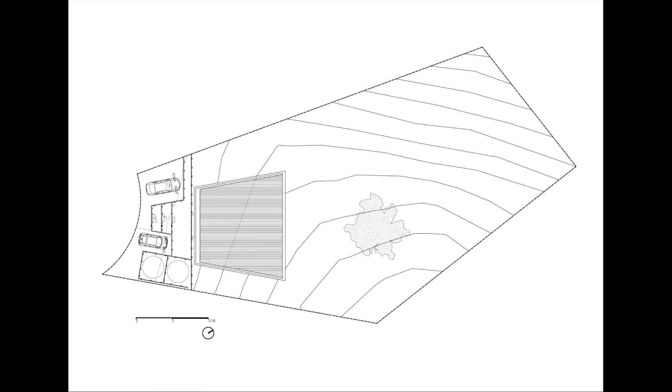The other advantage of that is from a solar orientation point of view, your northeast is your ideal orientation, right? So you've got your northerly aspect, but you've also got early morning sun preference, and then by the time it's getting past noon, you're starting to shade yourself. So from a solar orientation, it was ideal, and then from the wind, it was also a perfect match.

The other thing about this house, and probably it's my favourite thing about it, is it's a real Pandora's box in a way. It's a 4-bedroom house in under 100 square metres. So it's a very finely worked out plan, very minimal sized bedrooms, but again, it's just that idea of you need somewhere to stay for the weekend, come and get some bunks, put your bag on the floor, and then it's easy to pack up and go. So the house is about 100 square metres, the outdoor deck is about 20 square metres. So a large part of the plan is actually this covered outdoor deck.

The other way we sort of conceived of that deck space was not as indoor-outdoor flow. You know, you sort of hear this term of indoor-outdoor flow, we've got the big sliding doors and we open to the outside. We really tried not to do that, because with a small plan, we're actually trying to create lots of different smaller spaces underneath that larger ceiling. So we've created almost like a screen between them with a series of double doors, and that creates a very separate space in that covered deck area.

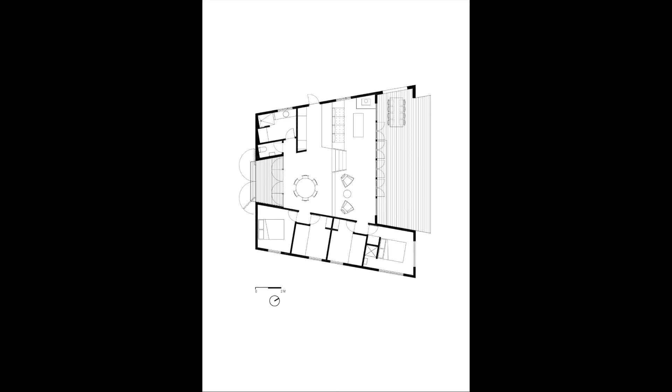This is a really successful house for having 18, 20 people around, 4 different groups doing things, kids everywhere, some people having quiet time, all within this very small package.

And to sort of enhance that separation of space, it steps down as the land steps down. So from the street, from the cul-de-sac, that's all you see of it. You basically don't see anything. It's locked up with big gates. There's sort of a recessed entry where you can hose the dog down and chuck your wetsuit, and then you get into the house proper.

So that's down into the front entry. And then that's from the south, the other side. So we're looking at sort of from the northwest direction. We just stepped the decks down and the levels to the maximum height legally allowed without a balustrade. So it is quite dangerous for small kids, but apparently the Building Code of Australia says not dangerous enough to be concerned, so I was okay about that. And it also just removes any obstruction of balustrades from your view.

That's from the main face. And then from the side, it's a really simple construction. It's one of those jobs that had a very limited budget. It's maximum volume, minimal sort of detail to it. The cladding is a silvertop ash cladding. It's in a wildfire overlay area, so it's one of the 5 species that protects itself and weathers into the environment.

So inside, we've got a dining area stepping down to a living area, then out to the deck. So as I say, quite a simple house inside, but incredibly efficient both in plan and in weekend use, being able to clean it and get out of there, and also for heating and cooling. So you just spend a lot of time down on that deck, you're always out of the wind. And it has a window in it, it feels like a room, it's got a very tall ceiling to it. And that's part of the way we got the bedrooms so efficiently, is we did these built-in bunk beds, and they sort of reference that back facade of the house in its design.

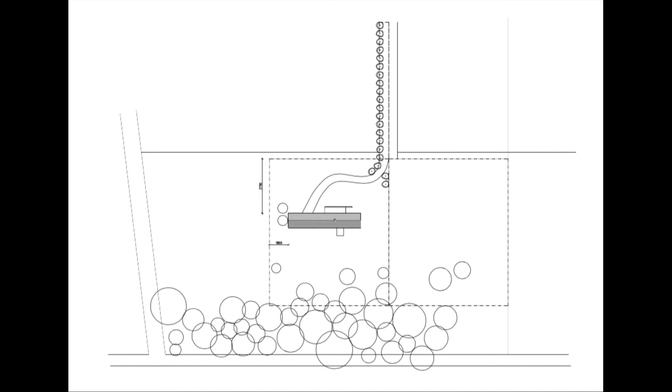And then we could also group parts of the house together under a single roof. So we had the main house where the retired couple lived, then there's the guest area, then there's a carport, then there was a garage. And so one of my first moves was to say, let's just put that under one long roof. So this is the house here. You drive in to the carport here. That's the northern orientation. There's some pretty ugly houses all around it now, and there's the trees.

So from here, we've got the main bedroom, an ensuite and wardrobe, a study, a kitchen area, a fireplace, 2 bedrooms, carport, and a workshop down here. That's the northern elevation, so it's got a spotted gum cladding, which weathers and greys off over time. And the north-facing glass is about 2.7 metres high and has these large sliding screens on it.

So in winter, a lot of heat gain onto the slate flooring, and in summer you can sort of close it off and restrict the amount of heat gain you get through there. In the early morning and late afternoon, with the eaves designed for midday sun to be completely blocked.

There's those large screens. So with that simplicity, a lot of it was about the texture of the materials that you're using. So with the stacked stone wall, the battened screens, and the cladding. And also that thing with the screens is that they cast a shadow onto the floor, especially in winter, which changes minute by minute as it sweeps across.

Very simple build for this, a plywood kitchen, slate flooring, and predominantly plasterboard. Again, just for that ease of construction. And you see here, so that's the north-facing glazing. So we're getting really good heat gain onto that slate.

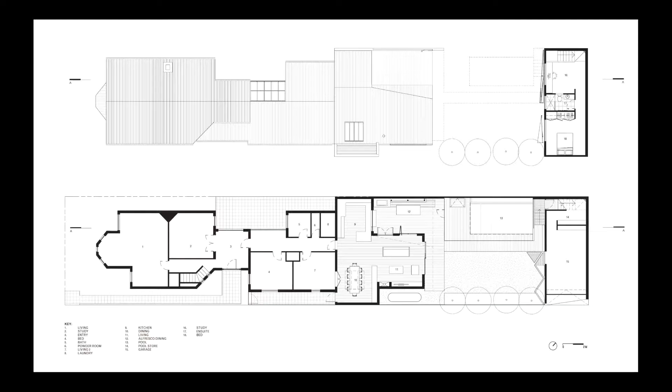Had a very tall, slender proportion on the street with this very weak sort of folded roof plane. So we just used all that timber framing that's there, that subframe, and clad it with the battens and brought it as a sort of a heavy timber, a heavy gable roof form. And Frank Lloyd Wright's Oak Park House was the sort of design reference for it. So that helped bringing the volume down on it.

And it really did change the appreciation that the neighbours had for the house and the street. When we were finishing this phase of the work, one of the neighbours came up to me and she said, "I love what you've done here. You've increased the value of all of our houses on the street," which I thought was pretty high praise.

Then once we got inside, we did very much a sort of front to back scheme for the clients. So the front rooms, we said, were the quieter formal rooms, if you like, and they would be the darker spaces in the house. And we would have quite a high level of contrast between the rooms at the front of the house and those to the back that faced onto the garden.

So these were the front rooms, living area, facing out to the street. And again, quite private areas because they do face onto the street, so not much connection there. A study that we put in. And then to the rear yard. So we sort of had a bit of fun with that two-storey structure out the back. It makes barn-like references for the structure.

What's going to happen here is that these large triangular screens are going to be completely overgrown with about 3 or 4 different creepers that we've got coming up through there. So that will extend that garden view up onto the vertical face, but also provide heat gain protection from the western sun as it hits that facade. So it will provide a barrier there.

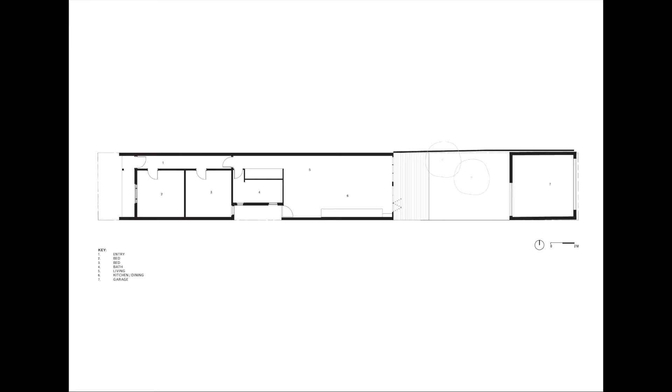Brick became a very important material for here. The client had a love of brick, and it was also quite contextual to the existing laneway developments that occur in this area. So this is the existing house. This is the street, one bedroom, two bedroom, bathroom, living and dining and kitchen, and then the garage. And then this is our proposed plan.

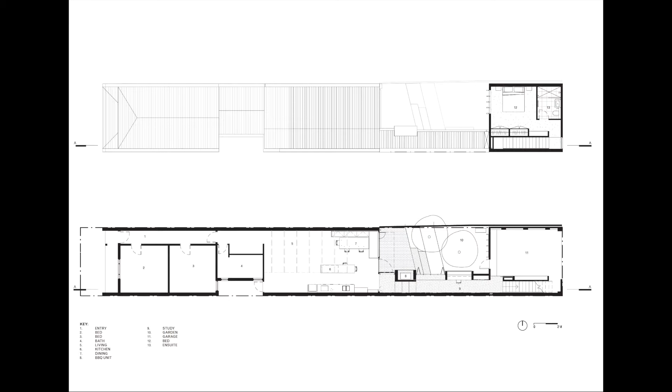Second section. So we have to play with scale in this. I mean, it's a small job, but it shouldn't necessarily look like it's just a small job. So we would do things like this. This barbecue enclosure is much higher, almost sculptural in what it's doing, which means that in a small scale job, you want somewhere for your eye to go to because you don't have a great view. So you want your eye to go to somewhere close by and in the mid-distance. And then that gives you a greater sense of the space that you have around you.

We also combined these, it's the window to the upstairs area, and then we've used black reflective glass going into the garage space. So instead it reads like this enormous void space or a much larger black glass window. Again, because glass during the day is black, right? So there's that whole misapprehension about what glass is. Glass is not see-through, glass is black.

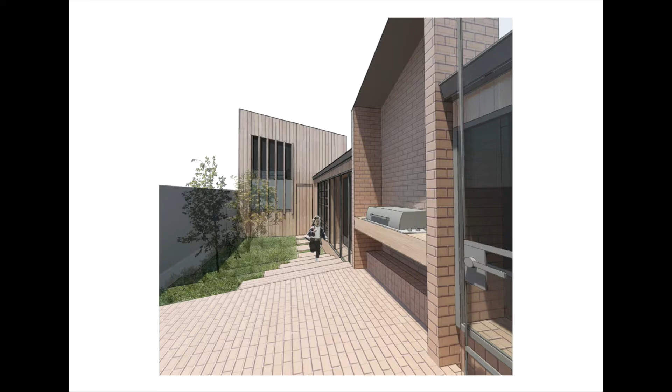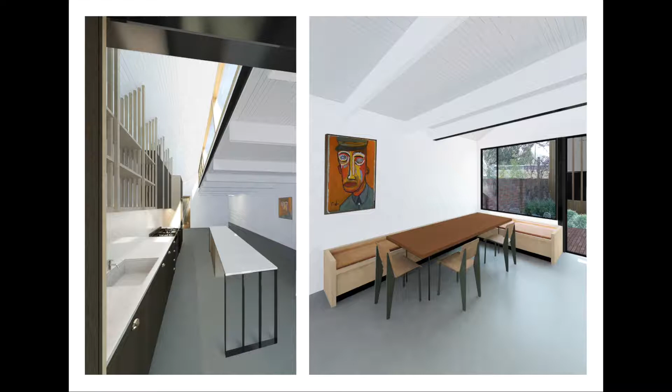And again, this is just a sort of basic render we did of that space, that study space through there and the steps. Building in a built-in seat, which again just saves a bit of space. The kitchen, which we're working on. So that's it from the laneway.

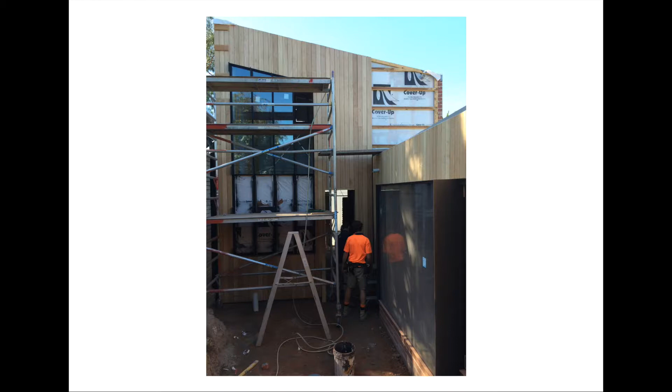And this is a construction shot. That's about as good a photo as I can get, standing right back against the wall and giving a shot. You can see the scale of it. You see this guy here, he looks like a giant because of the way those windows and openings are mannered. So they're sort of overscaled. So without him as a point of reference, it actually feels like a larger space.

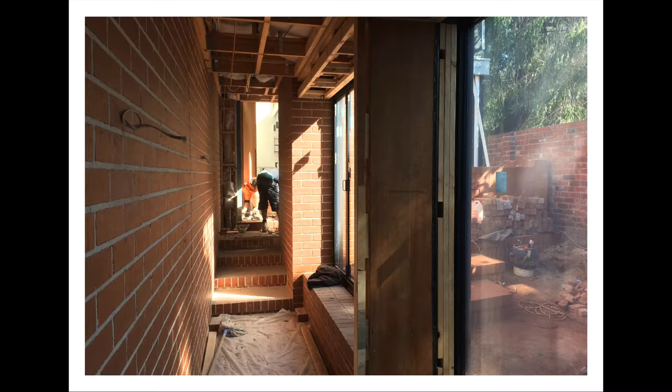And you're starting to get an idea. All that glazing is north-facing. So again, it's got some eave to it, it's got some overhang, but during the winter, sun's going to be coming in, hitting this wall. The corridor is then open to the main bedroom and the rest of the house, and that'll actually pull hot air through there at night.

And there's the chimney element. And just the material, always great with a small job like that. And the client's been really fantastic about indulging us in the material in every decision that we make. So right down to the brick coursing there, you see we've done what's called a staggered bond, but instead of staggering it on the horizontal, we've staggered it on the vertical. So it's just all those things you can manipulate.

The next two jobs are now working within a suburban context. And I think it's really important to actually highlight this context because I personally don't think we see enough good examples of residential architecture coming out of a truly suburban context, okay? Those two previous projects were in Carlton and St Kilda, and while they're great suburbs, they're not really a suburban context. They're really inner suburbs. They're very urban contexts. These two houses are out in Fairfield. They are much more in that suburban context of a single family house on a 600 square metre block, which is great.

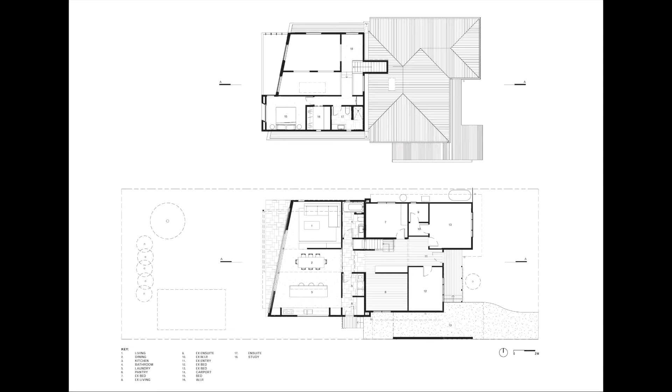The basic answer for that is, you'd basically do the two-story box on the back. Which is what we did, but we added these voids and views through and openings, and we've slightly kicked it out here to the north, so we're getting better orientation, providing big overhangs to the west for that late afternoon sun, and then provided a variety of spaces in what's actually quite tight plan spaces.

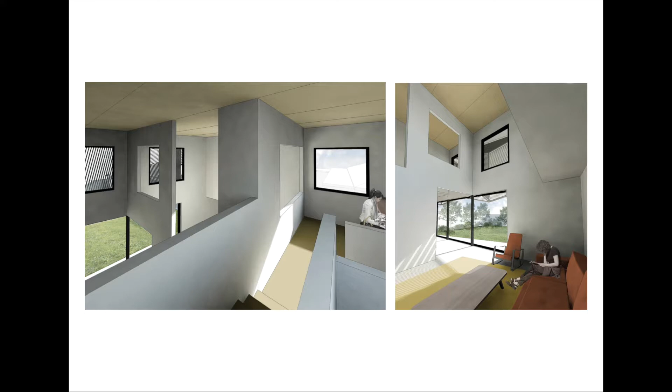So here we've got a living room, you've got a view outside, you've got a high window here which is screened from sun, then you've got openings through into the dining area. Upstairs you've got a study area with a bridge across, and again these views down into the living areas. So you get to play this game with views and light, family relations, like how you yell to each other or don't yell, and where you can hide away.

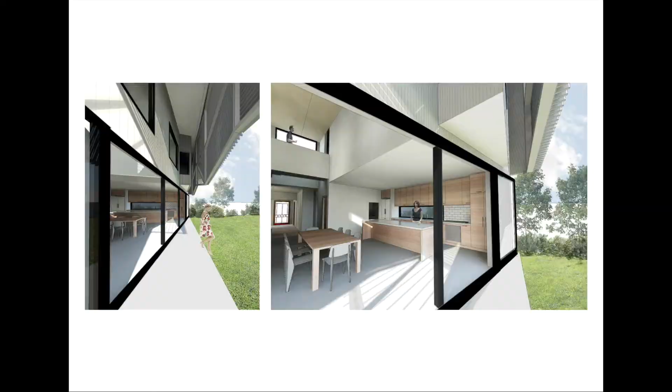This is an as-built shot, so I haven't had this properly photographed yet, but there's a few photos here that give you a sense of what it's like. So it's beautifully lit space. You never need to turn a light on during the day. The acoustics are amazing. They do love it.

And there's just the plywood ceiling, so a fairly cost-effective way to add a bit of warmth in that horizontal plane. All the lighting is uplighting, so you don't have, like what we've got here, light hitting the top of your head and a glare source from your light fixtures. The lights are located on the walls and bounce off the warm plywood ceiling. And when you get artificial light from one room bleeding into the other, windows leaking light, there's a very peculiar feeling of light in there.

The next house, and this is the last project I'm going to talk about, is the Fairfield Hacienda house. It's not far from that one we just talked about, and this was the site context that I was presented with there. It was an old bungalow that was pretty decrepit, and the clients bought it at auction and then had that removed. It was beyond any repair. And then they'd gone to a design build company and they hadn't been very satisfied with that. Came to me and said, what can we do?

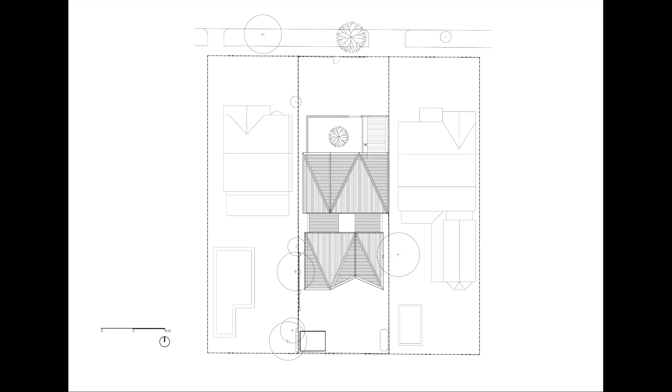So again, just flipped it here. This is north here, an enclosed courtyard, a living area, kitchen and dining. Carport to the side, with sort of the family entrance around here. Kids' bedrooms to the side with their own living area, and the parents to here, and a central courtyard.

This house, in plan, is like when Frank Lloyd Wright used to talk about his budget houses, they were always a 4-square house. So you do a square plan, and they have basically 4 rooms, and that's how you build effectively. When he did expensive houses, they became central living spaces with wings to either side. Okay, that was his sort of 2 plan types. In a way, this kind of combines the two of them. If you imagine that this is a central living space and there's a kids' wing here and a main bedroom wing here, they wrap around that central courtyard.

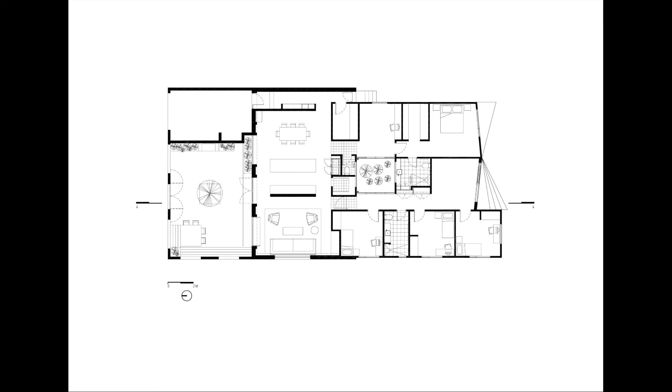And then this becomes this fabulous space that gets lots of natural light. You know what it's like when you go past a brick wall on a late summer evening and you can sort of feel the heat radiating onto the side of your face. That's what you get here. You can sit with your back against it, you feel the warmth. It becomes a space that contains a lot of activities. You can have dinner out there, you can go out there and have a cup of coffee and read the paper, the kids can play there.

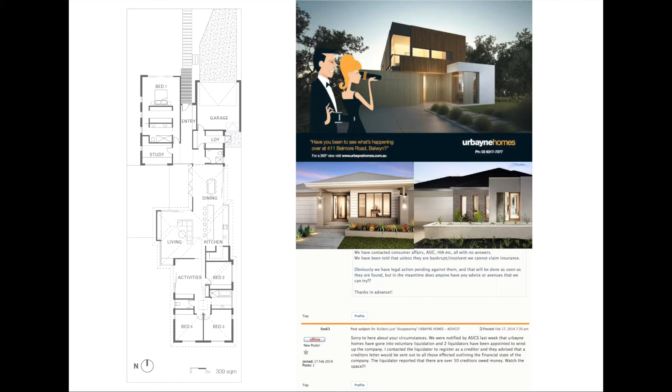And so the orientation was bad. Size was very large. So again, a very large house for the money, because they had default bedroom sizes and living areas which were larger than you need, which is why the Australian house is one of the largest houses in the world at the moment, like grossly oversized.

As you can imagine, you had to treat this delicately. When somebody comes to you and they say, we can get this 300 square metre house for $550,000, but we'd like you to do a better job. It was quite a process to say, okay, to start with, we're going to face you to the street so all your neighbours can see you. And the second thing we're going to do is reduce the area by a third. So it took a while to talk about that, but they were very open to it, very good about understanding why we were doing those things.

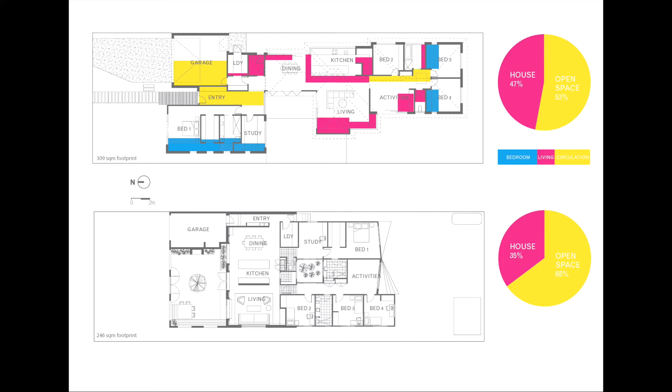This is the design build plan. I've identified here those shaded areas, area that we took out of their plan to arrive at this plan. Then, thinking about it, what was happening here is that the front of the house, that main bedroom, was looking onto the driveway, which was kind of a public interface between the street and the house. Public don't necessarily go there, but it's a visual connection, and that's the relationship that they have with the house.

The backyard is in yellow. That's private, that's just for the occupants, and the blue is the house itself. What we did here is we've really created semi-public space in that covered courtyard, in that open courtyard. Like I explained, the clients were very concerned about staying in the neighbourhood for a long time and becoming part of that neighbourhood. We thought if they lived a bit in the neighbourhood, you could make a connection to it. And that was kind of, I guess, a grand gesture, but one that's been incredibly successful.

So they are in here, they know all their neighbours, people come in. We advised that they put their veggie garden in the front and put a bit of citrus on the fence so that they're producing out the front. It also means that people come by and help themselves to mandarins, but that's totally fine. They have this relationship that you can be within that space and say hello to people or not say hello to people.

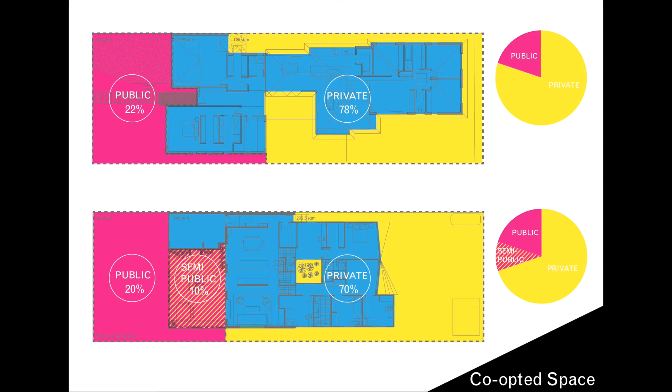So I started thinking about what that space was, and I came up with this idea that it's co-opted space. The definition of co-opt is to adopt for one's use, or to take over or appropriate. So what was happening here is that the Fairfield Hacienda was almost giving over part of its house to the neighbourhood. It was creating this blurred zone where it wasn't necessarily the house's and it wasn't necessarily the neighbourhood's or the street's, but there was a sharing going on. It was kind of a generosity that occurred.

So there's two instances where I see this happening. One is where a space is intentionally given over to others, which is I think what happened at Fairfield. And another is when space is intentionally taken over by others. A great example of where it's taken over by others is in the community gardens that I was aware of in the East Village in New York when I was living there.

So during the 80s, a lot of tenements that were in very bad repair were demolished by their owners for insurance purposes and left as vacant lots. They literally were just breeding rats, and homeless people would live there. In a lot of streets, the street would get together and take over that lot and build a garden in there, and they would all look after it and use it. And this continues to this day.